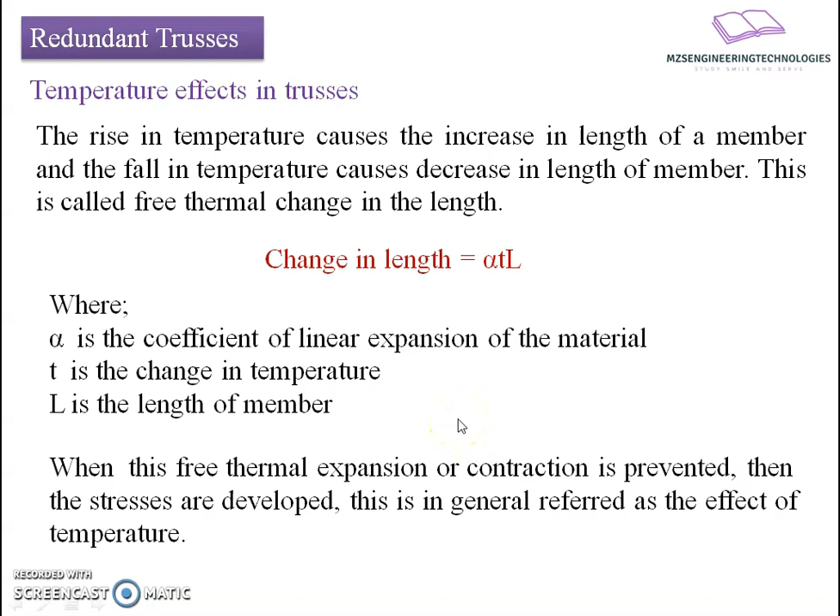the geometry. But it's not observed in case of indeterminate structure due to complex geometry, and this complex geometry leads to the increase in the member forces. So in case of indeterminate structure, it becomes necessary to identify what type of increase in member forces are there due to temperature changes.

In a statically determinate structure, no internal forces are developed due to temperature changes, as the thermal expansion and contraction are not prevented. Due to uniform temperature variation in an externally determinate structure, no internal forces will be induced. Means the unknown restraints will not have any effect on the expansion due to temperature variation in case of externally determinate frames.

Due to non-uniform temperature changes in externally determinate structures, the internal forces are developed. If non-uniform temperature changes are there, then member internal forces may be developed due to the end restraints. In an externally indeterminate structure, there are always temperature effects irrespective of uniform or non-uniform temperature variations, means whether the members are subjected to uniform change in the temperature or not.

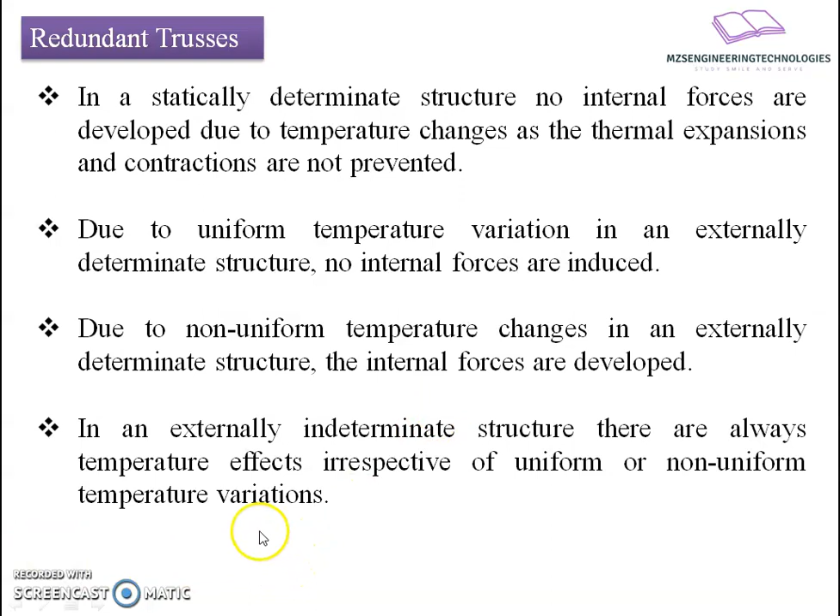Then we are going to consider the effects on the member forces due to rise in temperature in case of indeterminate structure. Now let us go towards the analysis of indeterminate trusses under the temperature change effect. For that, we'll solve numericals with the help of certain considerations here.

The very first part, the temperature affected member is selected as a redundant member with an unknown force x. Since we are going to make the indeterminate structure determinate by assuming that the member which has gone through a temperature change is a redundant member.

The displacement caused by this redundant member will be the product of alpha into T into L. Means whatever displacement is observed by this change in temperature, whether expansion or contraction, the value will be given as the product alpha TL, where alpha is the coefficient of thermal expansion of that material, T is the temperature change, and L is the length of that member.

The sign convention of this dx: when the temperature rises, it leads to the expansion of the member, and we consider it as positive, while vice versa, if there is a contraction in the member and the length of the member decreases, we consider it as negative. We want to know the effect of this redundant force on other member forces.

For that, we will do the analysis based on Castigliano's second theorem, where we say that the redundant force will be the value corresponding to the maximization or minimization of strain energy stored by the body with reference to the redundant force. That's why we will take the partial derivative of strain energy with reference to the redundant force.

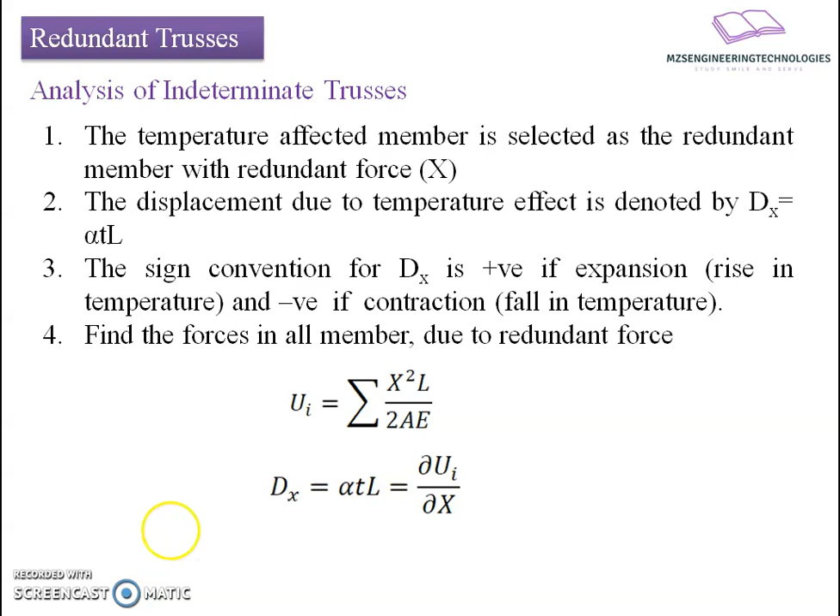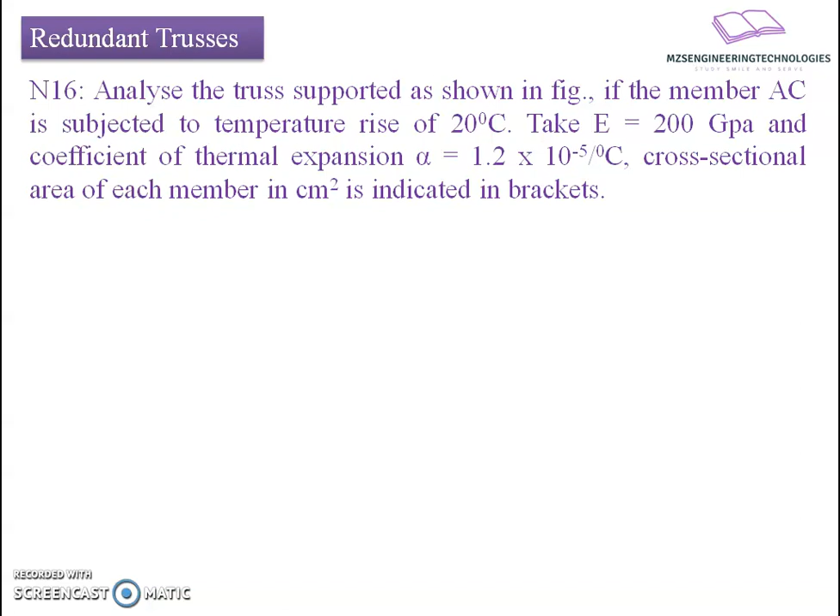Let's move towards numerical number 16. Analyze the truss supported as shown in figure, if the member AC is subjected to a temperature rise of 20 degrees. Take E equals 200 GPa and coefficient of thermal expansion alpha equals 1.2 into 10 raised to minus 5 per degree centigrade. Cross sectional area of each member in centimeter square is indicated in brackets.

The given frame is a 2-bay frame where the member areas have been given in brackets here: 20 centimeter squares for the peripheral members, whereas for inclined braces it is 10 centimeter square, 10 centimeter square. It is said that the member AC has been subjected to temperature changes. That's why we will consider the member AC as a redundant member, and we will remove this member to make the structure statically admissible.

And while removing this one, we will apply an unknown force X instead of this member AC in its position, so that the effect of this removal will be unaltered for the other member forces. Once we do this, let's try to find out the distribution of this redundant force among the other members. Let's say it is defined by the coefficients K1, K2, K3, K4 in respective members. So our interest lies in finding the value of K1 and then the value of redundant forces.

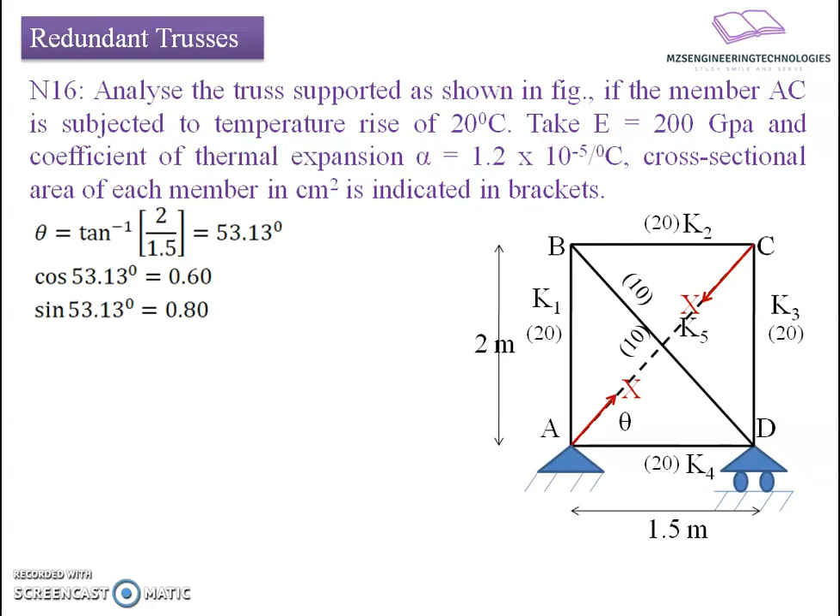To begin this, we'll start with the joint by joint analysis, and for that let's find out the inclination of the redundant force with reference to horizontal. We will take the geometry into consideration here: tan inverse of vertical height versus the horizontal width. From the triangle ACD, tan inverse 2 by 1.5 will be the angle traced by the redundant force. We require the components, so we find cos theta and sin theta. Theta works out to be 53.13 degrees, cos component is 0.6, sin component is 0.8.

After that, we will go with joint by joint analysis. Since there are no external forces, there will be no reactive forces developed at the end restraints. So we take equilibrium of the forces meeting at joint A. There are three forces, among which one is the redundant force X and two are the member forces K4, K1. The direction cosines are considered in such a way that the vectors balance each other.

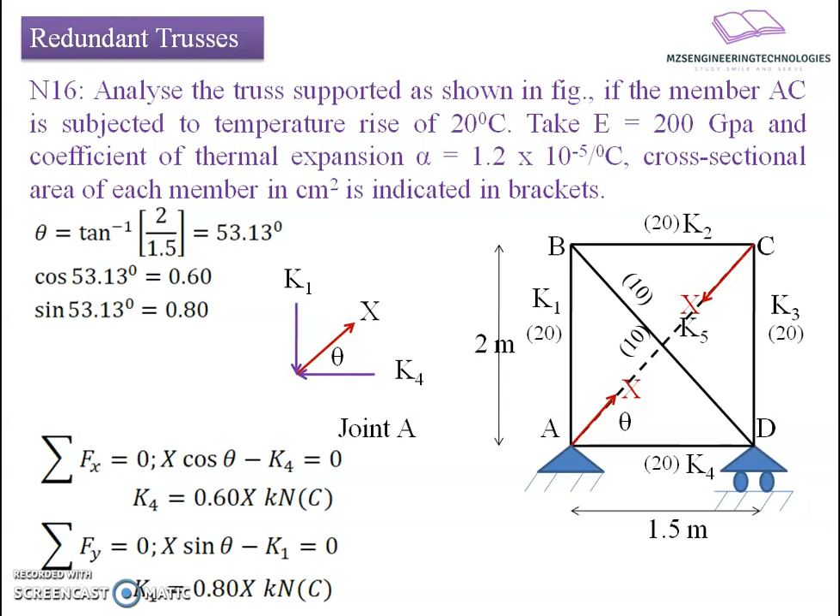Applying equilibrium equations, summation of forces in x direction results in the relation X cos theta minus K4 equals 0, giving K4 as 0.6 times X kilonewton, compressive in nature. Similarly, summation of vertical forces in y direction gives X sin theta minus K1 equals 0, leading to K1 equals 0.80 times X kilonewton in compression.

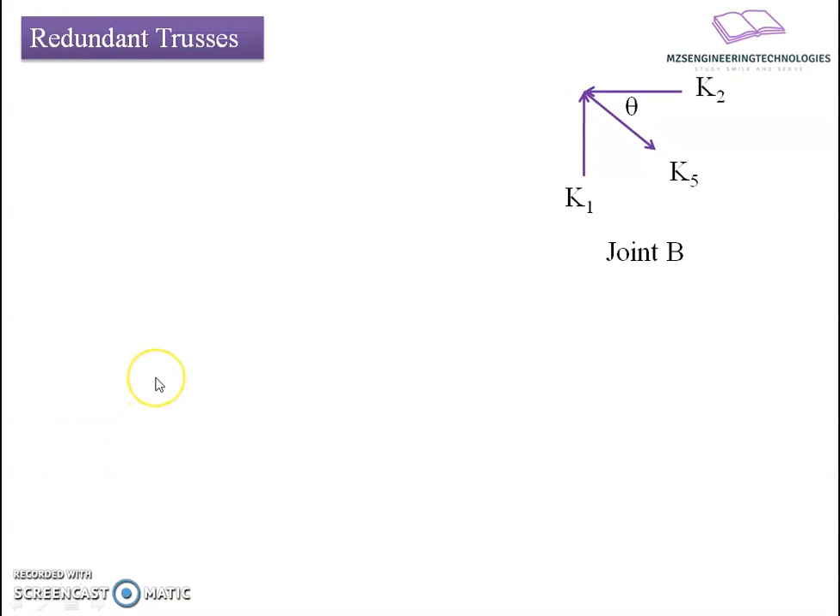Now, we'll apply the static equilibrium equations for joint B. The free body diagram for joint B shows three forces K5, K2, K1, among which we have just calculated K1. Two are unknowns, K5 and K2. Applying equilibrium in vertical direction, we get minus K5 sin theta plus K1 equals 0. K5 results to be X kilonewton, tensile in nature. For horizontal direction, we get K5 cos theta minus K2 equals 0. K2 comes to 0.60 times X kilonewton in compression.

Now after that, we'll move to joint C, where we have three unknown forces K2, X and K3. Among these, X and K2 have been found from the earlier analysis. Only K3 remains unsolved here.

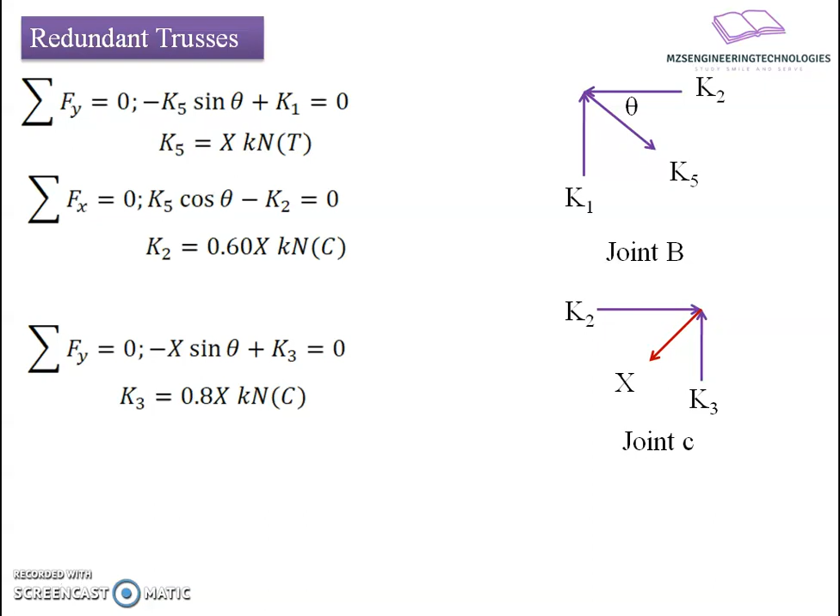So we'll write summation of forces in vertical direction equals to 0, resulting into a relation minus x sin of theta plus K3 equals to 0. K3 comes to 0.8 times of x kilonewton in compression. Once we know the values here, we will go for the determination of redundant. We will tabulate these member forces and other results to get ease in the calculation.

The table will consist of a first column about the member. So members are arranged in a manner that it will first go with the profile A, B, C, D, outer periphery, and then the inclined bracing will be there. The inclined bracing AC and BD. The area of the members are known to us. It's about 20 centimeter square for the horizontal and vertical members. It's about 2000 mm square if we convert into mm.

Similarly, for diagonal bracing, it is given 10 centimeter square. So if we convert in mm, it will be 1000. E is given to us. It's 200 kilonewton per mm square. Then K values we have just found out: 0.8, 0.6, 0.8, 0.6. They are positive in nature because they are compressive forces, and -1 times of x, -1 times of x for the inclined bracings AC and BD, where AC is assumed as a redundant force.

After that, we will take a product K square L by A. I am not going to substitute here E. Individual areas are different. That's why we'll take a product K square L upon A. It results into a relation 0.64 x square, 0.27 x square. Likewise, subsequently I will do for all members. Then I will take finally the summative value of all member products. It comes to 6.82 x square.

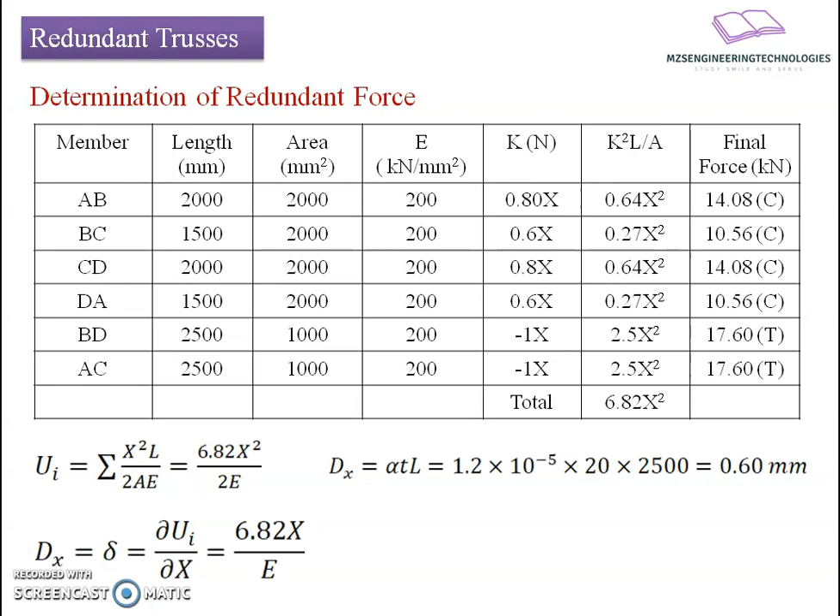If you talk about the dx, the displacement observed by the member which was under temperature change, it comes to be alpha into T into L. Alpha value we know, 1.2 into 10 raised to -5, multiplied by 20, the temperature change, multiplied by the length of that particular member, which works out to be 2500 with reference to the geometry given to us. The total dx comes to be 0.6 mm. If we substitute this value in the strain energy relation, we can get redundant force as a product of 200 into 0.6 divided by 6.82, leading to a value of 17.60 kilonewton. So here redundant force is of magnitude 17.60 kilonewton, tensile in nature.

Now with reference to this redundant force, let us try to find out the member forces. The force in member F1 will be equal to P1 plus K times of X. P, the external load, is not there. The P component will not be considered; F1 will be equal to K times of X. So I will take 0.8 times of 17.60 to represent the force in member AB, which comes to be 14.08. Similarly, I will do the product for the second part. It is 0.6 times of X. It comes to 10.56. Likewise, we will find out the forces in individual members, and finally these forces will represent the final force which has arisen in a member due to temperature changes.

Okay, with this I will stop my lecture here. We will come with further lecture series discussing the yielding of the support and the effect of yielding of support on the redundant trusses and determinate trusses.